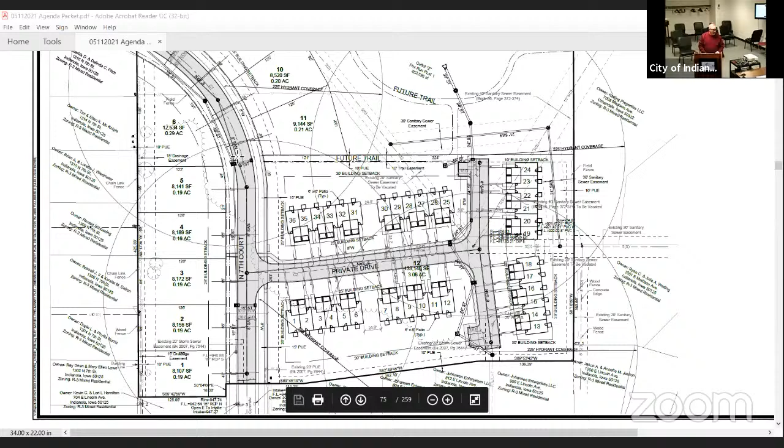Let me zoom out a little here so you can see it on the screen. That property outlined in blue on the back of the map is generally where this black line is. Let me pull up another view, this one shows it a little better since it doesn't show all the elevations, but you can see the single family homes. Can you see where the pointer is? The single family units are all located along this curved road, and the multifamily units are all back in this area here.

For perspective, the top here is north, and East Lincoln would be south, on the bottom of the screen. The proposed pond would be up in this area, it shows better here, but you can kind of see where that pond area is back there, it would be on that lot.

I've got Parkinson's, so you gotta bear with me a little bit. I'm not understanding the parking situation.

I live over there, and if you drive down Lincoln, the east-west road, on a weeknight or especially a Sunday night, you can't drive down there. It's weaving in and out. It's not that way all day, I understand that, but it is, and if everybody has the right number of parking spots, that's fine, but that doesn't mean they're using them. It's hard to get through. We don't go down that way anymore because it took us forever just to get through that section.

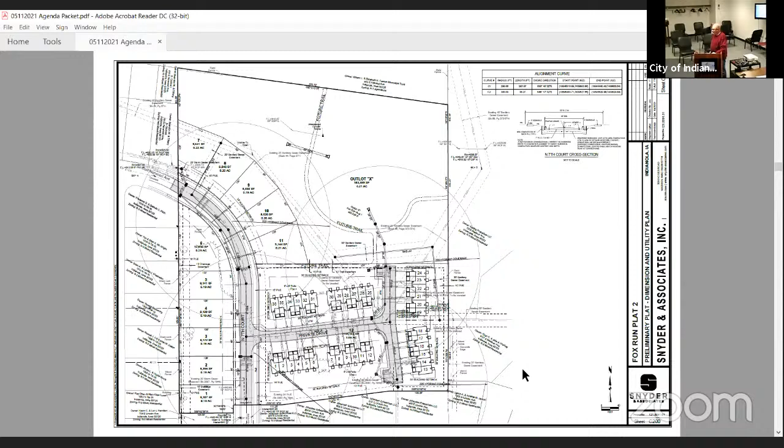The other question I have is off of 7th Court, there's a ditch there as it goes, a pretty good sized ditch. Are you talking off the stub there, and then back down into that area? Yes. Let me pull this one back up. Again, it might be hard to tell where these elevations are, but once you drop back into where that creek is, that generally runs from about this point and then out, that is a ditch.

Most of the development they're proposing is on the south side, so really before you get down into that ditch. What about the ditch, is it going to have to be on the stub there, there's a ditch that goes pretty deep there. Matter of fact, I think there's a culvert at the end of 7th Court, at the stub. Yeah, and it's pretty deep, where's that water gonna go?

When the new road's put in, they'll put storm sewer throughout and catch it within the road, then pipe it down into this detention basin. That detention basin has been engineered and calculated to handle that type of stormwater. Most likely, I'd have to look at it, but my guess is with that stub road, you've got stormwater running off it, probably for years, and it's created its own swale down into that creek bottom. So it's pretty deep. Yep, so what this would do is they'd grade that area back out, get it flat, and put the new road in with storm sewers, then pipe all that water down into the detention basin.

Okay, alright, I think that's all the questions I've got. And I guess if I have more, I'm in your office. Yes, anytime. Thank you very much. Thank you.

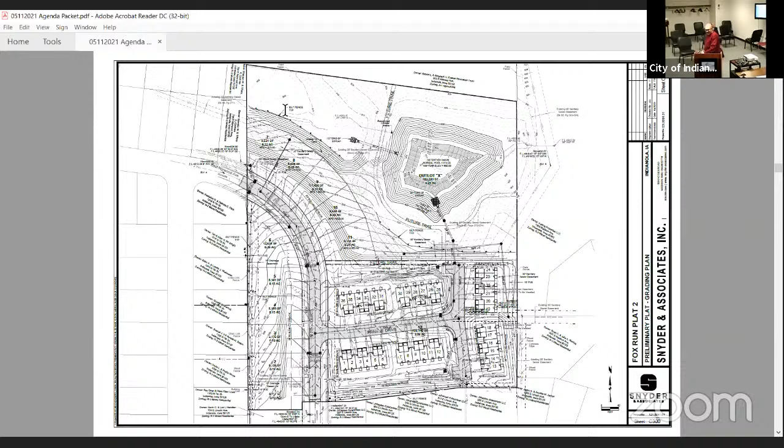Any other questions or discussion? Would someone like to make a motion?

Well, I think it has been a nice attempt to try to preserve the feel of a single residence along the road and kind of tucking the higher density off it. So I applaud the way that's been done. I'm always concerned with a little higher density in this area just because we've had issues with it, but it is a much less dense project than we've looked at in the past.

So with that, I will make a motion to approve, and I believe that was based on staff comments, correct? The recommendation? Yeah, the one condition we recommended was just to hold off on council review until all the preliminary plat comments have been satisfied.

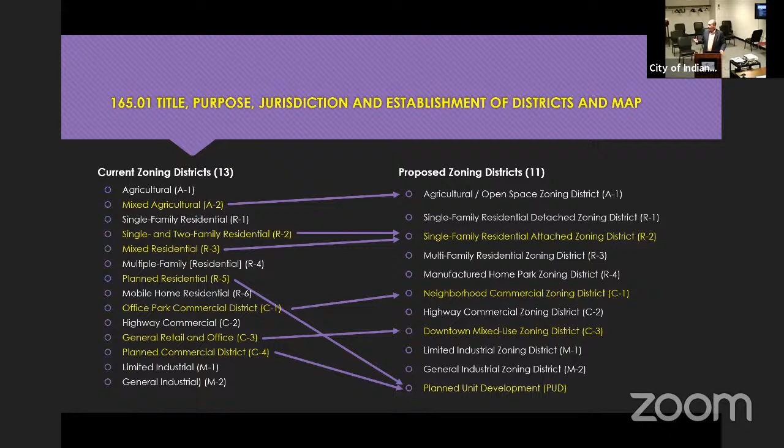And then we updated your office and retail districts to kind of mean what they are. So neighborhood scale retail, C1 is now neighborhood commercial. And instead of C3 being most of your downtown area, let's just call it the downtown mixed use C3 zoning district. So in that subchapter 2, procedures and amendment enforcement, this is just how we do it.

So how does the commission act? How does the Board of Adjustment act? Everything needs a building permit. Everything needs some type of a site permit. The roles of Charlie as your zoning administrator, the roles of the Board of Adjustment.

We have to have a certificate of occupancy for new buildings and change of use, how we amend the code, the application process, keeping it very flat and simple so that you, at a more administrative or council approval level, can determine fees and the actual application.

There's an entire section on definitions. We did a lot of update to modernize the code definitions. So when you come across a new term somewhere in the zoning code in general, this is where we go. I'm not going to run through those unless somebody has a specific question.

Under general provisions, we really start hitting into some meat. We have how we determine different types of setbacks, lot shapes, calculations, and then most importantly, the accessory buildings and structures.

And so those are like garages and sheds. We have fences, then how we deal with nonconformities and nonconforming uses. A couple things I wanted to note under accessory buildings and structures, because we did talk about this at length at the public workshop.

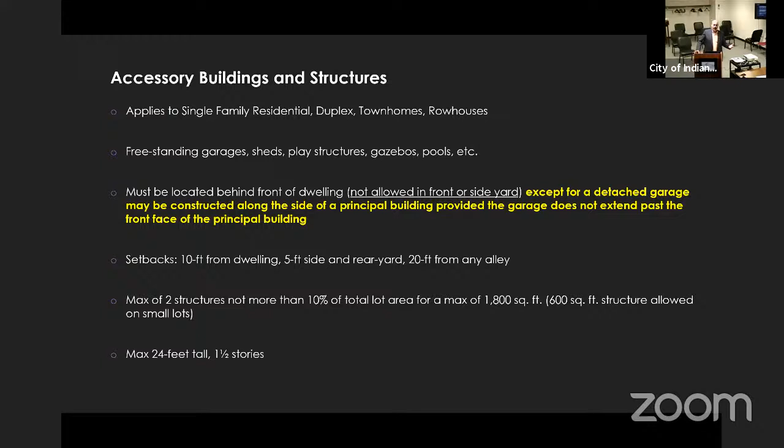One change we made, and I have it highlighted, is making it very clear that everything's got to be behind the house, the principal structure. Can't be in the side yard with the exception of the detached garage, but it still can't be any closer to the front. There was concern about having sheds in the side yard.

Then the zoning districts - our chapter, subchapter 5, is the biggest chapter, has a lot in there. We talk about all the rules and regulations for those zoning districts, and broke them into some tables we can look at instead of having to flip through all these different pages.

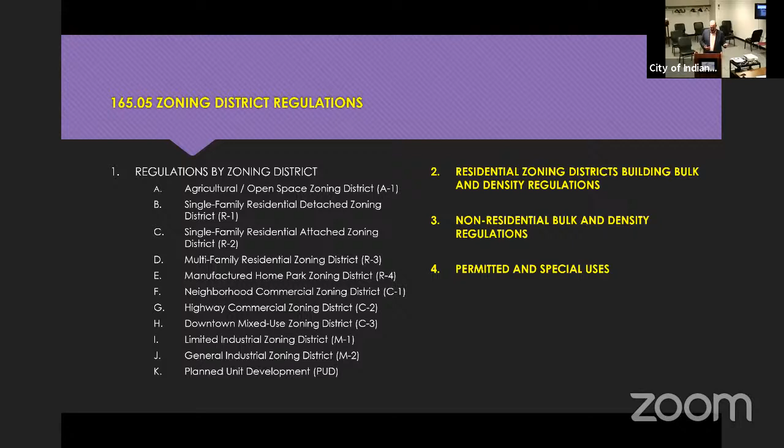So we have our bulk regulations, setbacks, density standards for residential, for everything that's not residential, and then what is permitted and what are our special uses.

We also have, and I highlighted some of these, other standards for our small wind energy system. Small wind turbines, you already have that in your code, so we transferred that over. We spent some extra time working on your solar energy ordinance section.

We have that thing about accessory dwelling units, home occupations, how we deal with some businesses that we sometimes want a little more regulation on. So delayed deposit credit institutions, check cashing places, pawn shops, or medical cannabis oil dispensaries.

I won't read all of this, but just so you know what's in your code, it's a one-stop shop for looking at what are my minimum lot sizes, density standards, setbacks, building height standards.

And in this case, for the residential zoning districts, we break it by use type. Because in an A1 or an R1, and in some cases an R2, I could have a single family house. So instead of having a different set of standards for each one of those zoning districts, we're saying that this is the standard for single family.

And the same thing with two family, a townhome, a row house, and multifamily, so think apartments, and then non-residential buildings in a residential zoning district, typically a school building, a church, maybe a government facility.

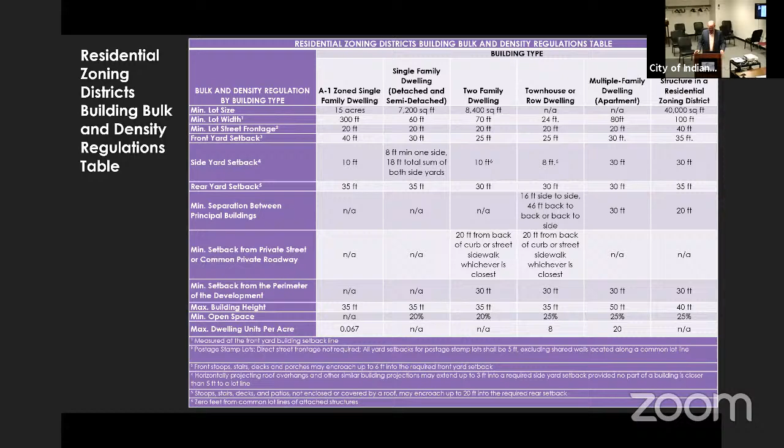Same thing then for those other zoning districts, the commercial and industrial. In that case, it doesn't matter as much the use, they're more standard applied by zoning district. In particular, notice C3, our downtown mixed use. We don't have those building setbacks. We do want things pushed to the property lines.

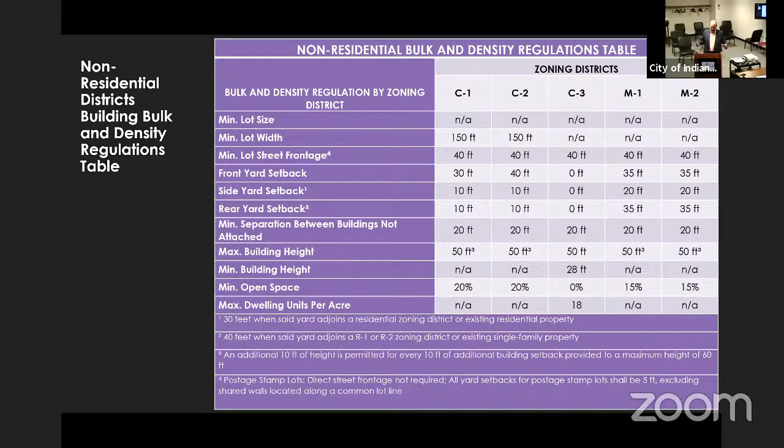Now, instead of how the code is today, which is actually quite a pain to go through, we're putting in a big table of what uses are permitted by each zoning district, and what are special use permits that can be requested from the Board of Adjustment. We're not doing use exceptions or use variances. These are certain types of uses that might be appropriate if they meet a certain test following the public hearing and review by the Board of Adjustment only.

So I might just take a little second to show that residential area. Across the top are the zoning districts, and across the left column are all the different uses broken into major categories. We have agricultural uses, and then we break it out.

A little further down, residential uses, household living. So single family detached permitted in Ag, R1, R2. That's your traditional single family house.

Single family dwellings that are semi-detached - think of that as a duplex where you could have individual separate ownership of each unit because there are two different lots, they're just sharing a common line. Might be with a special use permit approved in R1, but is permitted in R2 and R3.

Then you have your 2 units on 1 lot. Some people call it a duplex, but for the purpose of this code, we're just calling it a 2-family dwelling. In that case, you don't have separate ownership of the units. Permitted in R2 and R3 only.

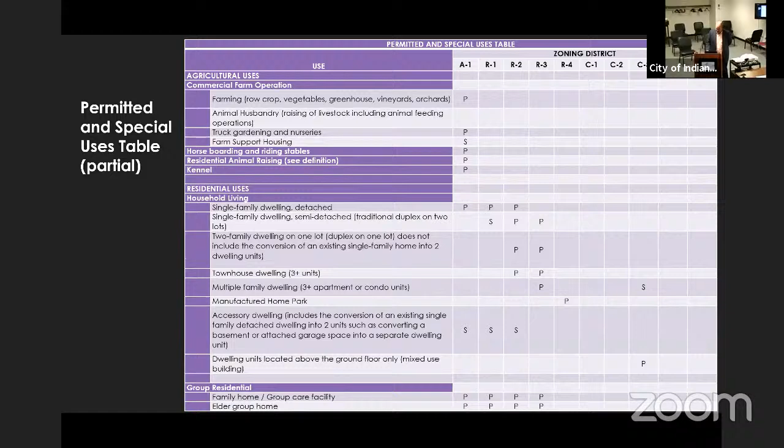I think the coexisting of the two can occur. So as I think through it, if this was an individual request, the recommendation we'd be making is to look at allowing them in industrial zoning districts, but by special use permit. That way we still have a little regulation on it. We're not just saying we're going to allow them in every industrial zoning district no matter what the condition is. At least with this, we have the opportunity to take a look at the surrounding conditions, the surrounding uses, the traffic patterns, and be able to make a decision off that.

Just so everybody's aware, special use permits are reviewed by the Board of Adjustment, not by the Planning and Zoning Commission. That's by state code, required to be reviewed by the Board of Adjustment. So we'd like to get the commission's feedback on that as we move forward, and if that's something that would be considered, we can make that change before we take it to council, if it's something you're willing to consider.

I remember on the steering committee when we talked about that. I think all of us kind of thought, little kids, big heavy trucks, not compatible. But since then I talked to Charlie about it, I talked to my wife about it, and I thought about it more. And I really think doing it by special use permit is the way to go, so it can be more specific to the individual site where the proposed child care center would be.

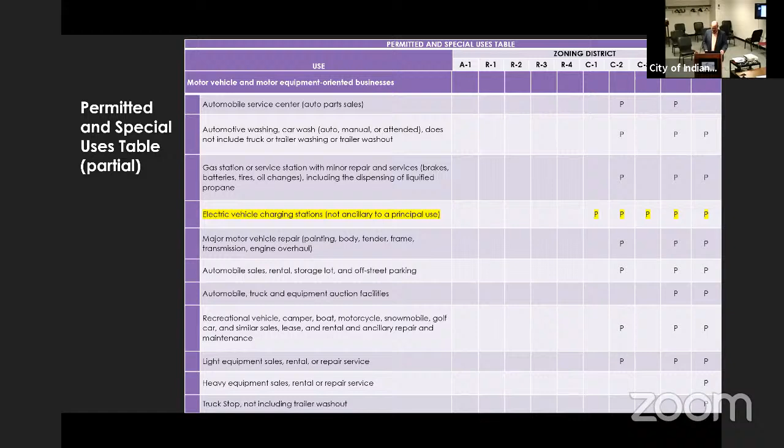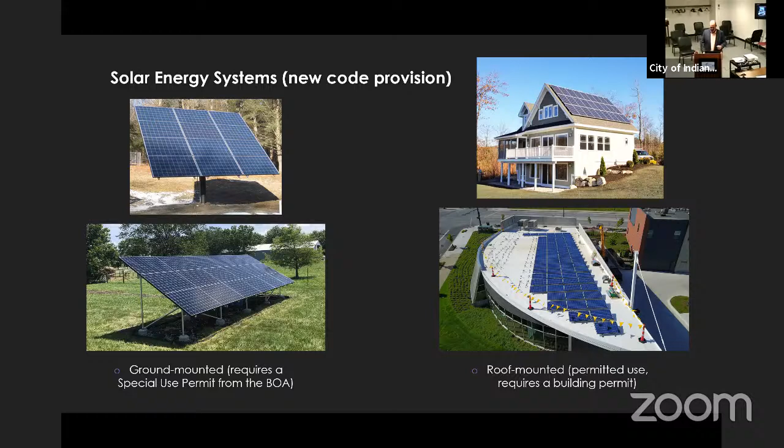We also copied some provisions from the Iowa solar model ordinance to address aesthetic considerations without going too far, and I'm happy to go into greater detail on that. It addresses things like height, setback, and visibility, and actually waives the lot coverage provision, because in a single family situation a freestanding solar array would be considered an accessory structure. So from a setback standard that applies, but we're not making it count against the lot coverage requirements, since that might be a little too prohibitive.

Okay, any questions on that before I keep moving on?

I just want to quickly note on that solar provision, that public meeting had quite a bit of discussion. To begin with, I don't remember what the standard was at that point, but I think you needed a certain number of acres before we even allowed it. We got a lot of feedback, and I think you saw in the comments included in your packet that there was quite a bit of feedback on there.

It was pretty split, to be quite honest, on the feedback, even at the public meeting. Some people said we shouldn't allow it, some people said we should. But like Chris said, I think the compromise to those comments was let's do it by special use. That allows us to look at the area, see if it's appropriate, see if it works in the setting it's being proposed in, all of that before allowing it to be used.

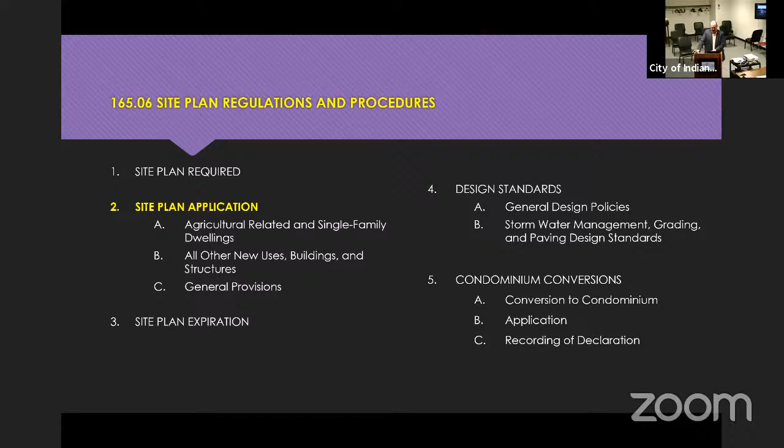All right, let's talk a little bit about site plan, because this is one part that is definitely going to impact you as a commission. We have in the code today a site plan procedures and requirements section. We've kind of expanded this a little bit and broke it out into a few pieces. I want to talk about the application and application types. Otherwise, most of this section is really consistent with your current code.

So if you're an ag-related building or structure, or related to single family like a single family garage or detached garage or fence or something like that, you're still at that building permit level. We're not changing that. However, most everything else requires some type of a site plan.

We're breaking it into two parts: a major site plan, where you're doing something significant or brand new, and a minor site plan, where you're doing a small building addition or some modifications to a site. So typically a commercial or nonprofit, not a single family residential or ag-related site.

The major modification would require commission review and then city council approval following your review. Whereas that minor site plan, if it follows all the zoning code requirements and meets our standard as a minor site plan, could be administratively reviewed by your zoning administrator.

The special use permit, and the site plan that typically comes along with it, would only be reviewed by the Board of Adjustment, kind of as a nod back to what state law is telling us, as well as some case law. So hopefully that's clear as mud.

So you're going to start seeing site plans, at least the major ones. And on occasion, Charlie might throw one up that's a minor one, but maybe it's a little controversial and he wants you guys to weigh in.

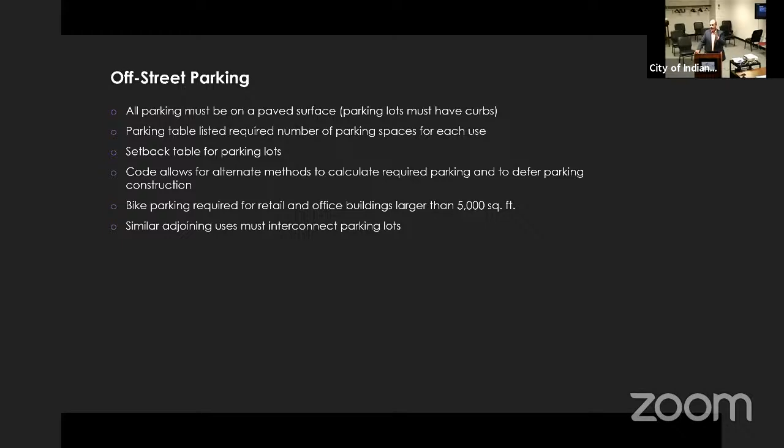Nothing's more frustrating than leaving a retail store and having to drive back out on the highway just to immediately turn again. So where it's mutually beneficial, we require that connection. What the ordinance doesn't say is that a church has to connect to a McDonald's - that wouldn't be reasonable. We're talking about similar commercial uses.

That specific 24-foot standard might adjust when we do the subdivision regulation standard updates. We spent a little more time on specific street design standards with Public Works, but 24 feet is probably a good starting point as a max at the street right of way. Obviously the street apron itself gets a little bit wider.

Really quick, I want to point out - the commission may not be aware - when the Board of Adjustment is reviewing variances lately, especially, I'd say 80 to 90% of the variances being reviewed are for driveway width, because currently we limit to 20 feet on a driveway, or if you have extra frontage, no more than 25% of your front yard. So anytime anybody wants to add an extra third car stall onto their driveway, they've got to come to the Board of Adjustment for a variance - and they're always getting approved.

One of the things any planner will say is when you're reviewing and approving the same variance over and over again, it's time to make a change. The other one, discussed here earlier, is on accessory buildings - the height of accessory buildings. So between driveways and height of accessory buildings, we're constantly reviewing those variances. This code will decrease the number of variances we're seeing. We may potentially see some new ones, but I'd imagine this would cut those variances probably by 75%.

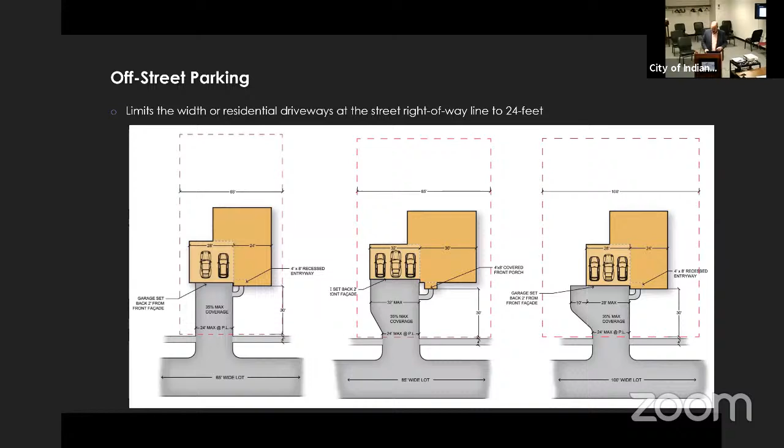In fact, one thing I meant to say early on in this presentation is in a year, maybe two, we should come back and look at this code and see what little things we want to adjust and fix. That's a common, typical thing. We often say we draft to a 90th percentile - you can never draft a code that's absolutely perfect. You're trying to get most things right, and over time you're going to decide something you didn't like, or something you want to be a little less strict or more strict on.

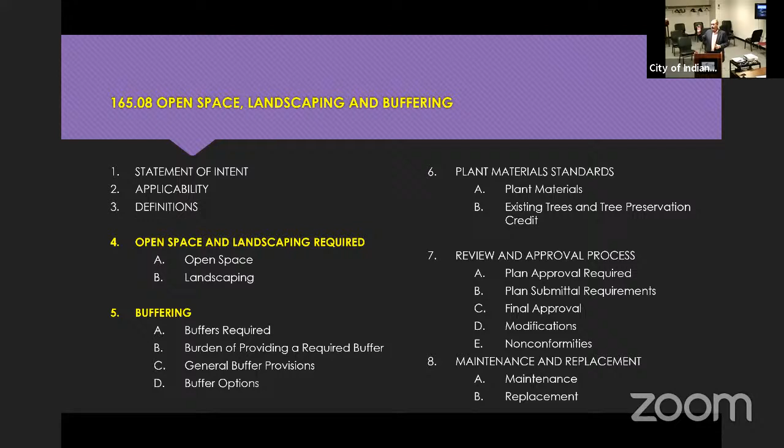Okay, next, another new chapter is on open space, landscaping, and buffering. It's to establish some very specific landscape standards, in fact to memorialize the landscape requirements you have, say, for new single family development. So I'll talk a little about that, and then some buffering provisions between dissimilar uses - retail business up against residential, something like that.

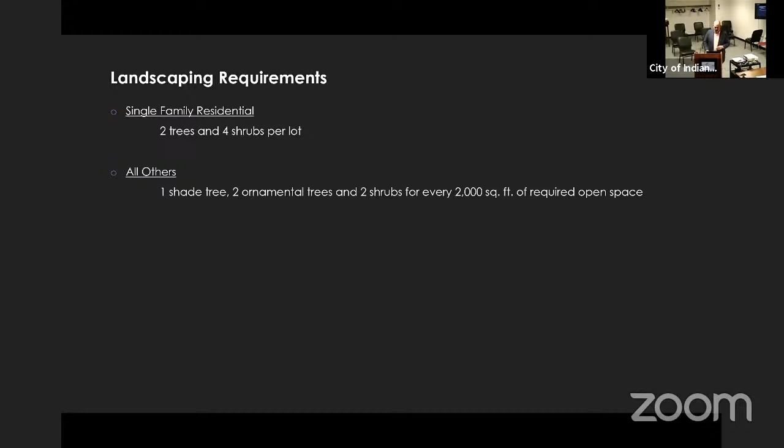So for single family right now, it's 2 trees, 4 shrubs per new lot at time of occupancy - just memorializing what you have. For everything else, we have an open space standard established - so many square percent of open space required for a site. Then for every 2,000 square feet of that required open space: 1 shade tree, an overstory tree, 2 ornamental trees, and 2 shrubs - we've defined all of that. We've also added very specific standards for landscaping within parking lots, think Hy-Vee, Walmart, your big parking lots, that have to have those islands on the end rows.

You have to have sidewalks connecting through. We have to have landscaping within those islands. And then if they front out along the street, we want so many shade trees and ornamental trees per linear foot. And then this one's a little more controversial, but this headlight screen, as we typically call it, within that

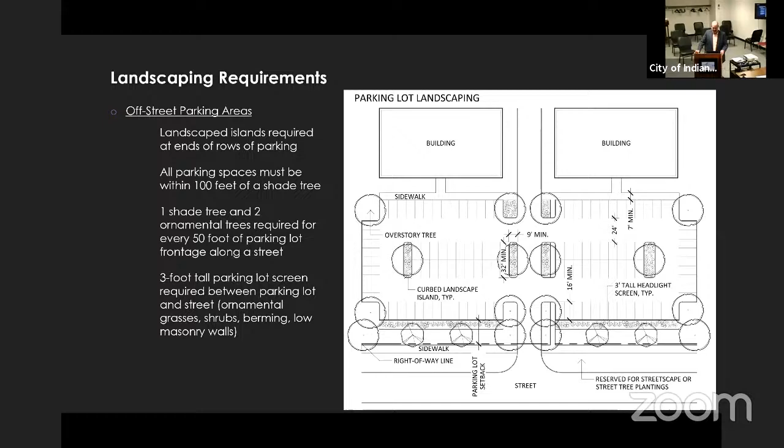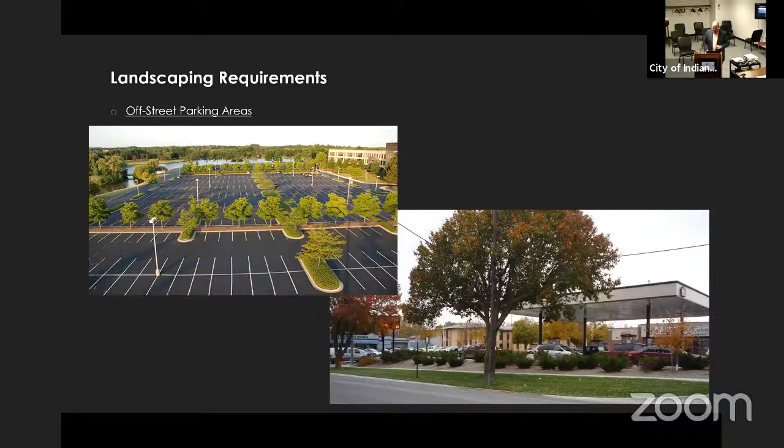Okay, and then the last one's a really lengthy chapter. I can go through all these slides or hit the highlights. So I'll start with hitting the highlights.

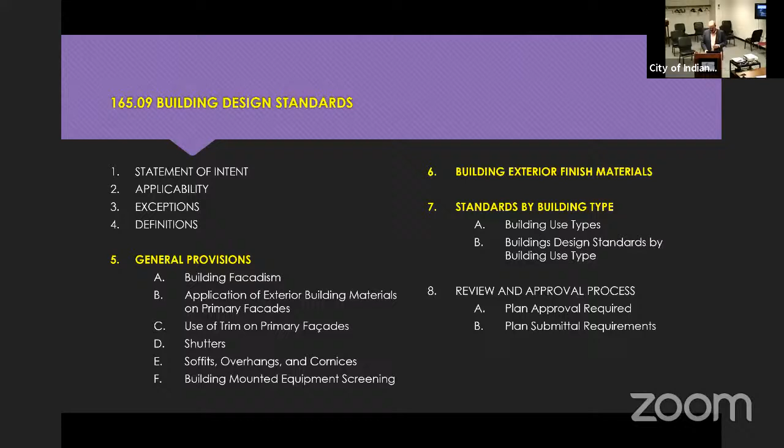This is all about building design standards and being very specific. But to do that, we have to define a whole lot of things up front. So you have these general provisions. We talk about building materials, and then how do we apply those building materials by zoning and use type, by building type. And so this is going to apply to new construction and additions that are greater than 20%.

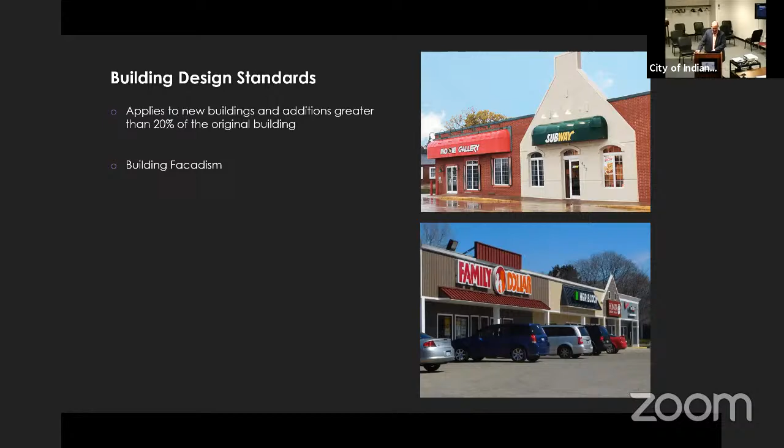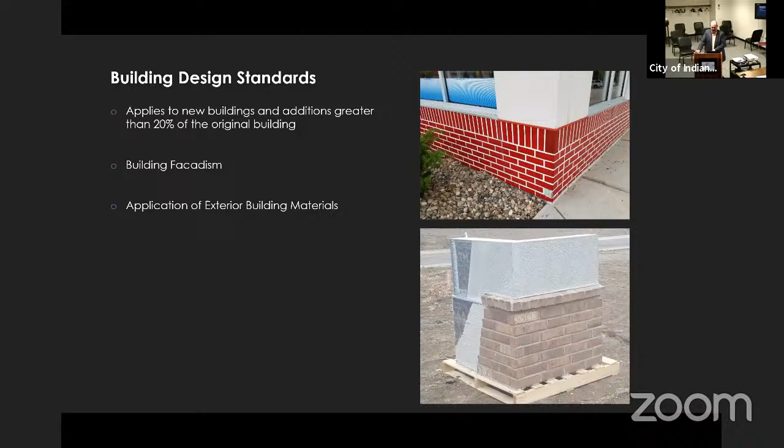That if we're going to use thin brick, thin veneer stone, that it looks real. It's just how you apply it. It's quality installation. You're going to build a nice building.

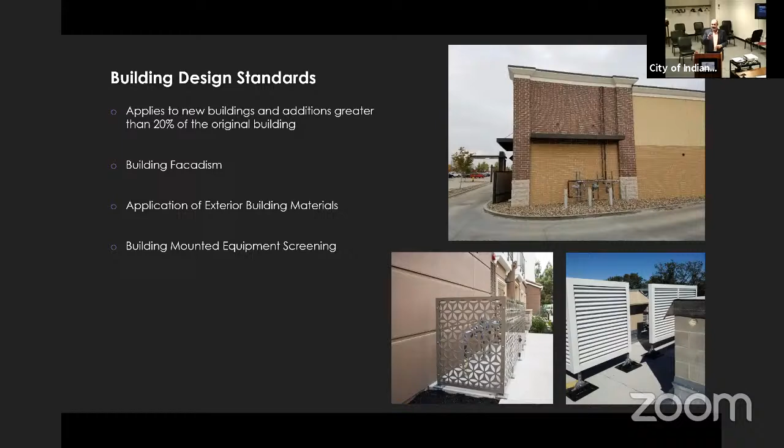Why not screen the mechanical units, the meters, piping, things like that. So the image above is a really nice masonry, really well done building that the mechanical contractor got excited and shoved the gas meters as well as the rusty gas pipe right upside the building. It's currently streaking on that brick too, by the way, because I drive by this all the time. And that is a street view too. That's street facing.

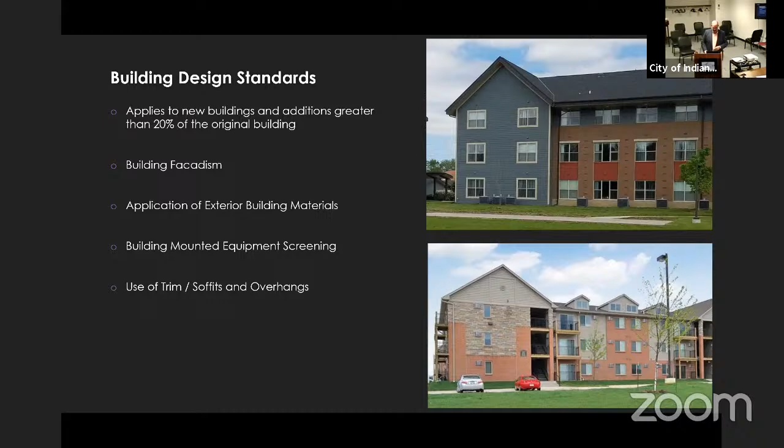That when appropriate, when architecturally appropriate, a little bit of trim goes a long way without adding a lot of extra cost. And that bottom image is really saying heavy material on the bottom, lighter materials on the top. You don't put stone above brick, unless it be some real special architectural style, but Bob can correct me.

And then here we talk about wall and wall articulation, just a little bit of movement in and out on the wall plane, especially in this case, differentiating between each unit can have a huge impact. That picture above, that's all vinyl siding and vinyl trim. So we're not talking, it's got to be some kind of really expensive product necessarily, but those changes to the roof line, the in and out, those porches really make a big difference.

So the next section of this chapter, we talk about building materials and we break them into categories. I'll spend just a little bit of time going through them, and we class them as 1, 2, 3, or 4. So 1 and 2, those are the great materials you want to have a lot of. The 3, that's kind of a standard material that might make up the bulk, the sides and back of the building. And class 4 is a less desirable material.

Maybe it's a little bit of a trim element that we're trying not to have a lot of. So this is all broken down by category. So we have things that are masonry and stone, so real brick, thin brick veneer, brick paneling, and we just kind of class them accordingly to their value.

Some of this is a value judgment. So as a commission, over time especially, you may change your opinion on one of these products, especially if somebody brings in something that's a little bit new. Hey, we've updated this product, it looks a lot better, lasts a lot better. And so there's some flexibility to make some adjustments for that.

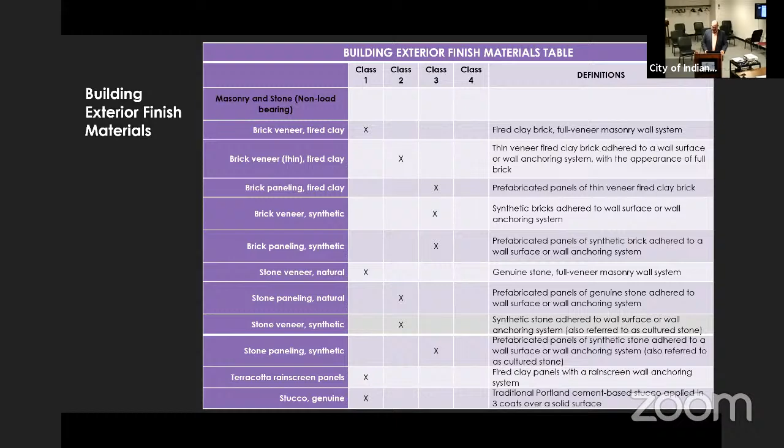We have concrete block in all its different forms. We have concrete, so think tilt-up concrete panel, precast, cast in place. It can be very, very high-end, and it can also be very, very cheap.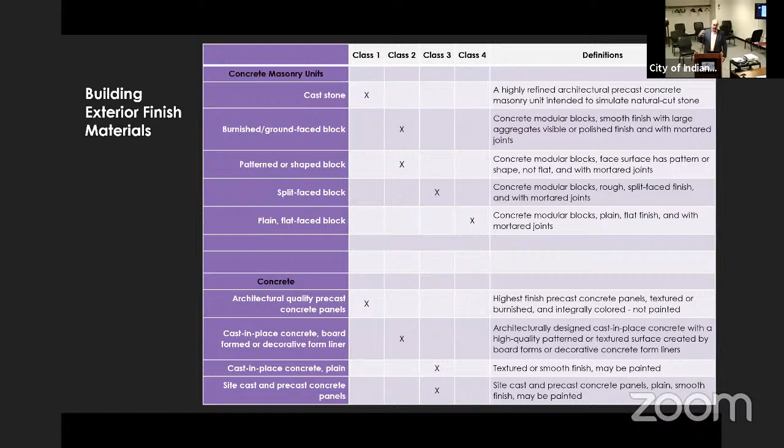And then different types of metal. Metal's another one where there's architectural grade metal panel that's incredibly high-end, very expensive, very nice. Can make a very quality office building. And of course, then there's the wrinkled tin that maybe you don't want to see, like an old barn stock.

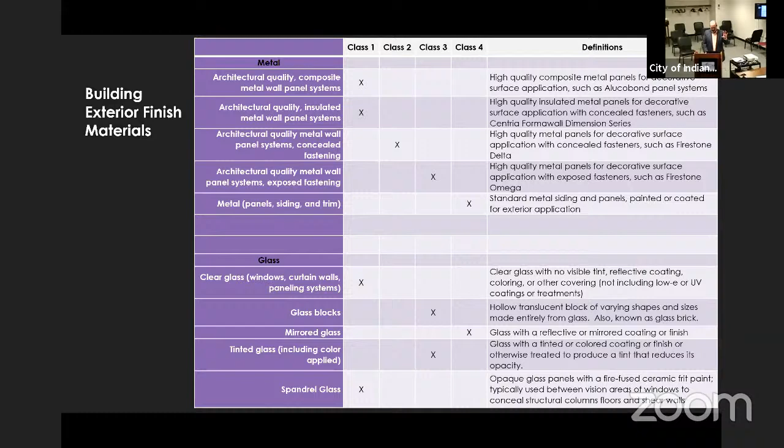And then glass, typically clear glass, is kind of always a class 1 material, something we like to see a lot of. And then it has different forms. We have all of our other materials.

One we normally spend a lot of time fighting about is vinyl siding, and EIFS, which is a synthetic stucco. We use a lot of EIFS in construction typically, and some people love it, some people hate it. Typically the EIFS suppliers love it.

It's also really easy to install, and you can do a lot of different building shapes and forms. And over time, that may be one of those materials that we start to value up, because the folks that make it are producing a stronger cladding, a heavier, thicker clad EIFS that you can hit with a hammer and not just have it shatter.

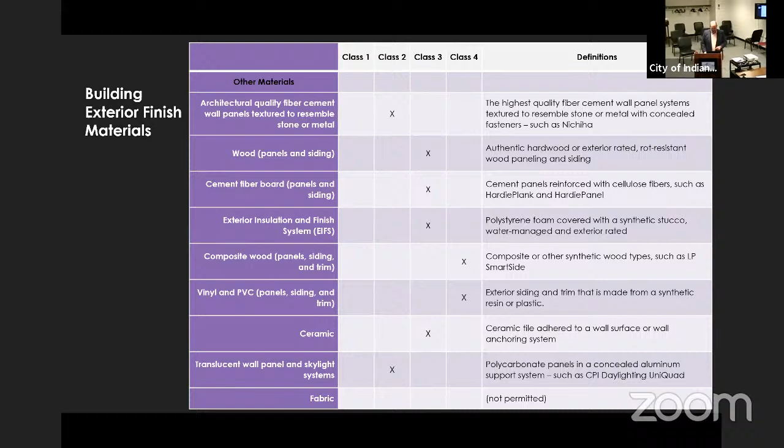Okay, so by building type: ag, single family, townhome, row houses, apartments, commercial, and so forth. In the code, we talk about how you have to have so much of each different type of material on the street-facing facade. So we're not trying to beat up all the sides of the building. And in fact, in ag and single family, we're basically saying there are no specific regulations for building materials.

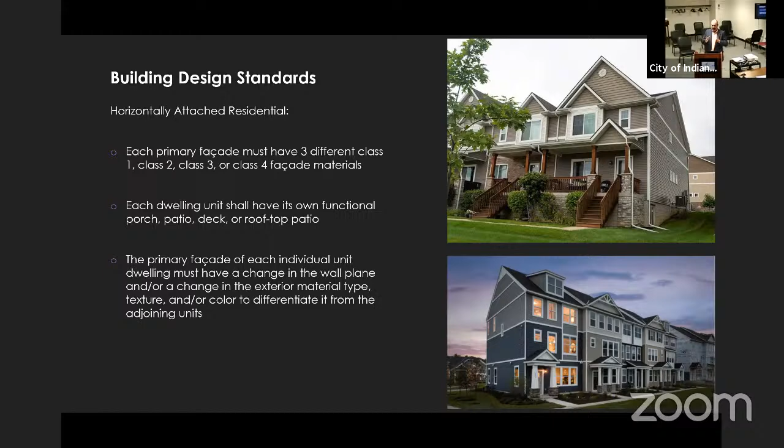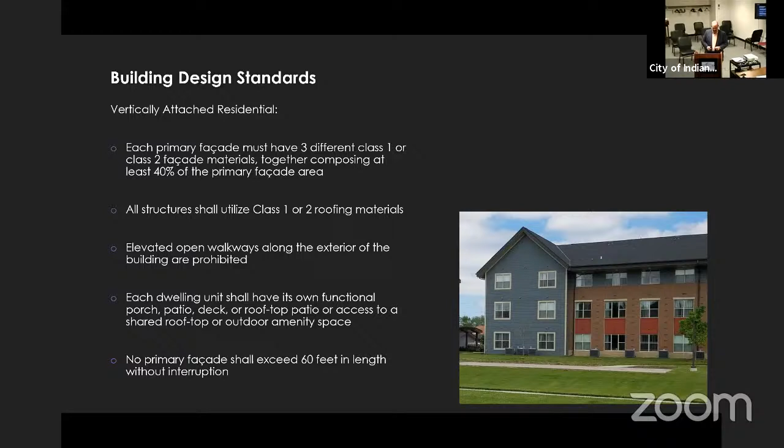Every unit has to have some type of functional porch, patio, deck, rooftop outdoor space, rooftop amenity deck, or outdoor amenity space. This is to address one of the concerns I heard about a certain product type in your town, so let's make sure they have that usable outdoor space. And then we also want that facade broken up, in this case, at least every 60 feet.

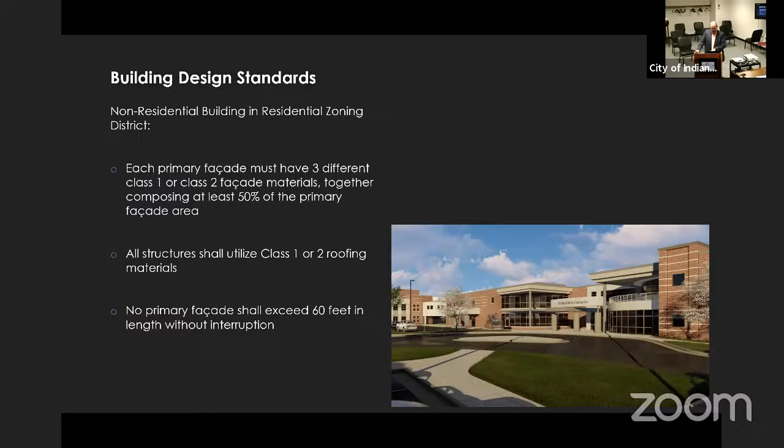And then non-residential buildings in residential districts, schools, churches, things like that, a little bit higher standard, upping it to 50% class 1 and 2 materials on that street-facing facade. And then it just keeps going from there. Retail, commercial buildings up a little bit higher yet, 75% class 1 and 2 materials on the street-facing facade. Often it's easier for them to hit this because they're going to do a lot more windows.

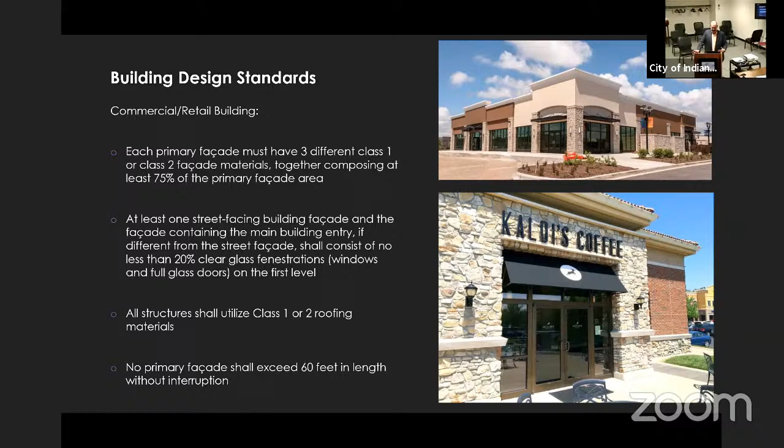Office buildings - in fact, one thing I did want to note, you see on the retail buildings, we want at least 20% clear glass on that first floor street-facing or entry. Most retailers are doing that. This will help you with a couple of retailers who tend to get less excited about having people be able to see into their businesses. And so it tends to be a real valuable thing to most regular retail businesses.

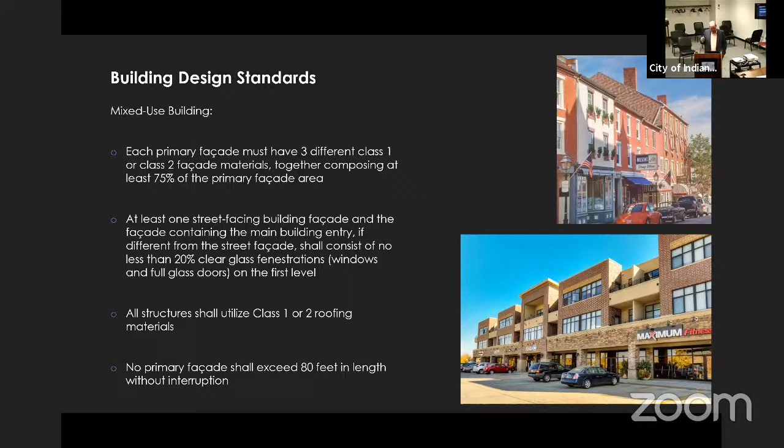In fact, in like a downtown district, sometimes we say 50%, or we get 75% or 80%. Office buildings, we don't do that - we pull that back down a little bit. Mixed use buildings, that's where we kind of push up the standard just a little bit more again. And then industrial, the last one I'll show you, we pull it way back down because they're industrial buildings - they are what they are.

In this case, we still have that primary facade, that street-facing facade, with 2 different materials. So it could be just glass and a quality tilt-up concrete, together making up 80% of that front facade. And then with that, kind of breaking up the wall every 100 feet.

Okay, that was a lot to run through. Is there anything anybody wants me to go through in more detail? I didn't want to take all of your night.

And I can pull up the whole code and show it on the screen as well, which we did with the steering committee. Oh yeah, we should really praise those folks a little bit more for their work. Several of them spent a lot of extra time providing additional comments too.

I do have one specific point. I talked to Charlie about this earlier. I think in the existing code related to fences and walls, it states specifically that if you want to construct a fence or a wall, it has to be contained entirely upon your property. That's not in here, and I think that should be added. It's common sense and you kind of assume it, but it's not clearly stated. Now it's clearly stated that the good side has to be out on the fence, which I think we all remember making that change, but I think we ought to be pretty clear that if you're going to construct a fence or a wall, it's got to be all on your property.

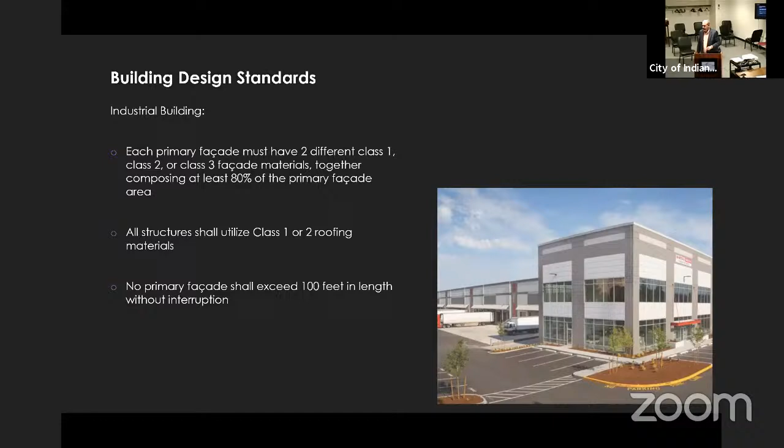Yeah, and that's typical what we tell people - if you know where your property pins are and you run a string between those two property pins, as long as the fence is on your side of that string, that's good. That's what we would consider to be wholly on someone's property. Sometimes you're getting down into some very minor details with fencing, but yeah, I know our current code, and we carried most of it over, and I did look at that after hours, and we didn't have that on there.

So I think just adding that wholly-on-your-property thing doesn't hurt by any means. Anything else? Anybody have any objections to that right now? That's probably a pretty easy one. Anybody listening in? Bob was super helpful too, by the way.

Well, that's all I have for the presentation. I'm happy to take a seat and answer any questions or do whatever you guys want. But I have written down those two things - related to the fence must be wholly on your property, and a special use permit in M1 and M2 for child care centers, the commercial ones.

Okay, so Charlie, what is the action we need to take? So I kind of put this similar to what the comprehensive plan was. I know with the comprehensive plan there was quite a bit of review and it took a few meetings with the commission to get through some stuff. This is a little bit different, as you're now creating the regulations that we built based off the policy of the comprehensive plan. So at some point, and if that is tonight, noting that there's not too much objection, I think it's appropriate that it's tonight. There needs to be a formal recommendation from the commission to have these be our new zoning and site plan codes.

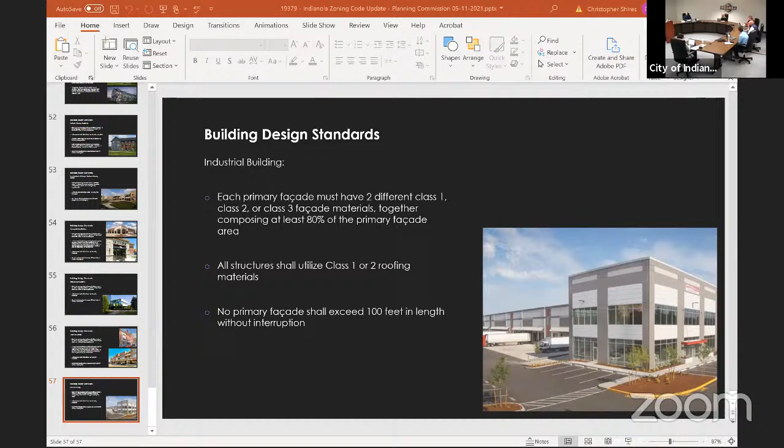Agenda item 8, comments, building permit report. I don't really have anything to add, the reports are in there. If there's any particular questions, I'd be happy to answer them, as well as with current projects.